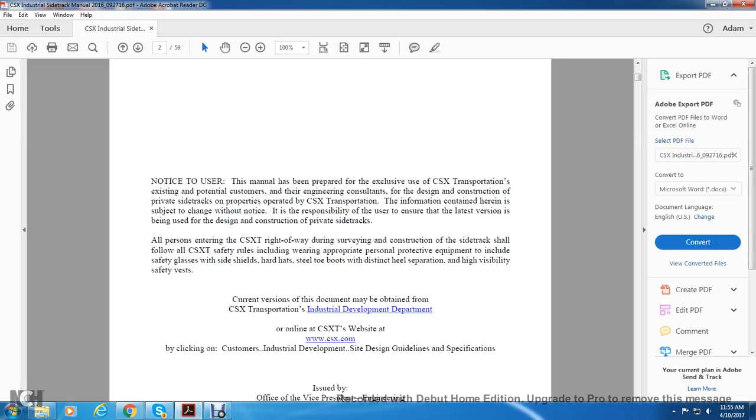All persons entering the CSXT right of way during survey or construction of the side track shall follow CSX Transportation safety rules, including wearing appropriate personal protective equipment, to include safety glasses, shields, hard hats, steel toe boots, distinct heel separation, and high visibility safety vests.

Current version of the document may be obtained through the CSX Transportation Industrial Development Department online at the CSXT website, csx.com, by clicking on Customer and Industrial Development, Site Design Guideline Specification, issued by the Office of Vice President Engineering, CSX Transportation Incorporated, 500 Water Street, J350, Jacksonville, Florida, 32202, 2016.

Standard specification for the design and construction of private side tracks. Design. Table of contents: Design.

A. General. B. Roadbed and drainage. C. Track design, Table 1, turnout geometry data. D. Structures. E. Clearance. F. Crossing. G. Hazardous materials. H. Design criteria, Table 2, Design criteria. I. Plans furnished by industry.

Diagrams: Clearance diagrams, all these are diagrams. Standard clearance matrix, roadbed sections, ballast section, roadbed sections, grading of the industrial track, turnouts number 8, turnout and crossover, number 8 offset layout, number 10 turnout and crossover.

Number 10 offset layout. 11 foot, 0 inch vertical lift derail, commercial track, A 640.6(2).

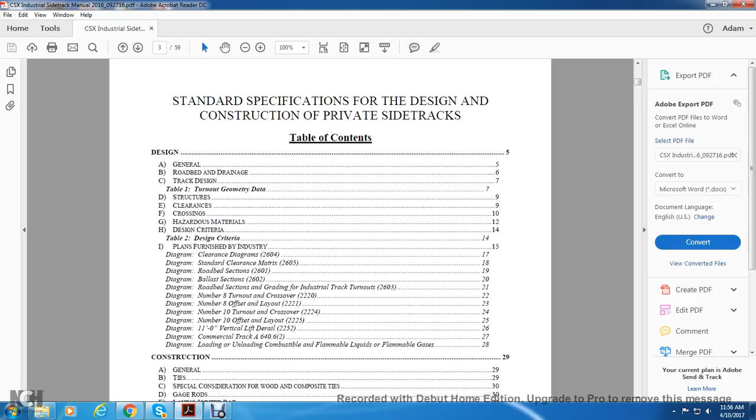Loading and unloading combustible, flammable liquids, or flammable gases.

Construction: A. General. B. Ties. C. Special consideration wood and composite ties. D. Gauge rods. E. Laid joint rail.

Table 3, expansion required joint rail. F. Laying welded rail. G. Spiking. H. Super elevation spirals. I. Surfacing line track. J. Grade crossing.

K. Final cleaning. L. Derails, bumping posts. M. Gates and fences. N. Inspection. O. Maintenance. The following are diagrams.

Main track spiking patterns. Side track spiking patterns. Turnout spiking patterns with the Bethlehem 811 style braces. Turnout spiking patterns with the Bethlehem boltless style braces. Turnout spiking patterns with the Clampttie style braces.

Joint area spiking patterns. Light duty road crossing, concrete and rubber panels. Normal road crossing, rubber asphalt timber wood ties. Sheet 1 and 2, normal road crossing asphalt timber and for wood ties. Diagram: normal road crossing asphalt timber wood ties.

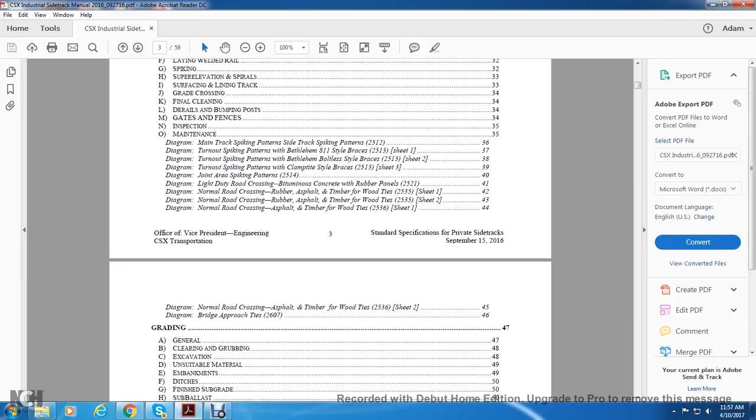Sheet 2, bridge approach ties and grading. A. General, clearing and grubbing. C. Excavation. D. Unsuitable materials. E. Embankments. F. Ditches. G. Finished subgrades.

H. Subballast. I. Geotextiles. J. Pipe culverts, Table 4, corrugated metal pipe specifications. Table 5, elliptical metal pipe specifications. K, erosion protection. L, temporary crossing. M, protection and safety of delay of trains.

O, access materials. General scope, subballast, Table 6, subballast gradation requirements. Table 7, track ballast gradation requirements. E, ties. F, tie plates. G, rail. H, turnouts. I, derails. J, bumping posts.

Design. A, design general. The guidelines are intended to provide information and guidance for the design specification for the construction of private railroad track.

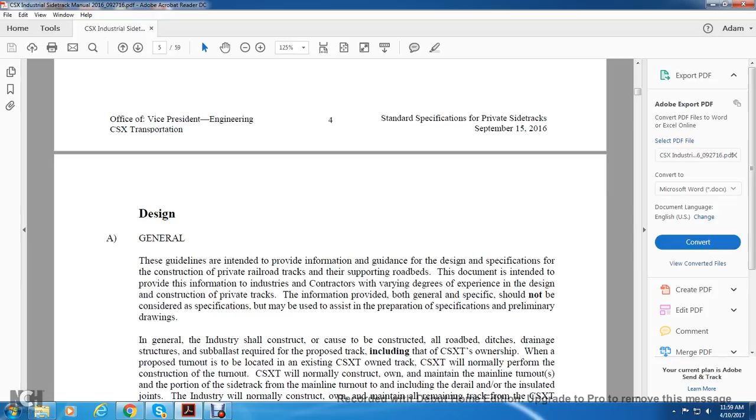In general, the industry shall cover the construction of all roadbed, ditches, drainage structures, and sub-ballast required for the proposed track, including CSX Transportation ownership when the proposed turnout is located in an existing CSX Transportation owned track.

CSX Transportation will normally perform the construction of the turnout. CSX Transportation will normally construct, own, and maintain the mainline turnout portion of the sidetrack mainline turnouts, including the derail and insulated joints. Industry will normally construct, own, and maintain all remaining track from the CSX Transportation owned point into the rest of the industry.

For a proposed turnout located within existing industry-owned track, the industry shall construct, own, and maintain the track. Final ownership and maintenance points will be determined with CSX Transportation.

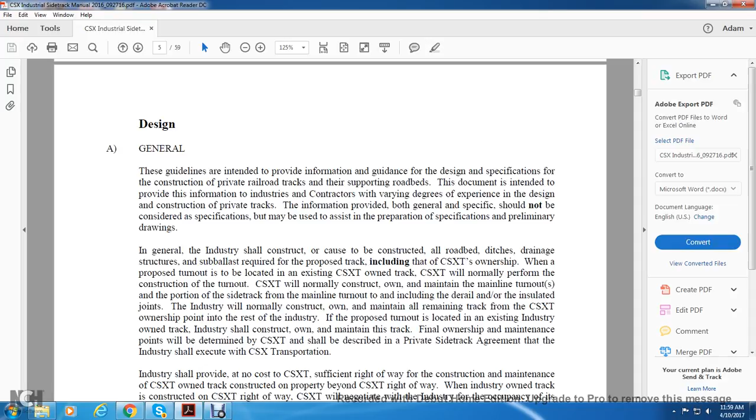This shall be described in the private sidetrack agreement that the industry shall execute with CSX Transportation. Industry shall provide, at no cost to CSX Transportation, sufficient right of way for the construction and maintenance of the CSX Transportation owned track constructed on property beyond the CSX Transportation right of way.

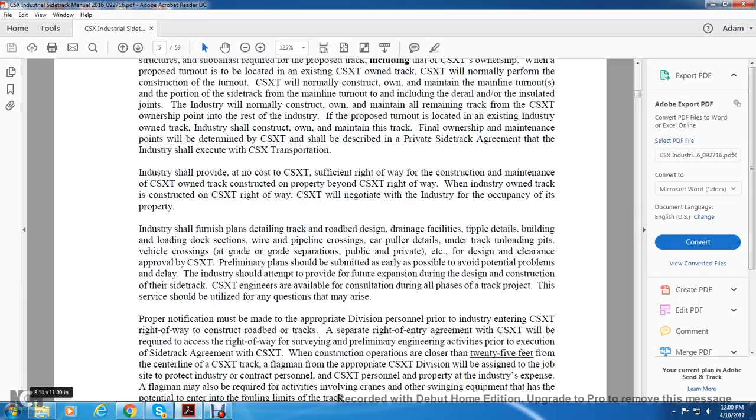When industry's own track is constructed within the CSX Transportation right of way, CSX Transportation will negotiate with the industry for the occupancy of its property.

Industry shall furnish plans with detailed track and roadbed designs, drainage facilities, detailed buildings, loading dock sections, wire and pipeline crossings, car puller details, under-track unloading pits, and vehicle crossing grade separations, public and private.

For design clearance approval from CSX Transportation, preliminary plans shall be submitted as early as possible to avoid potential problems and delays. Industry shall attempt to provide for future expansion during the design and construction of the sidetrack.

CSX Transportation engineers are available to consult with industry during all phases of the track project. This service should be utilized for any questions that may arise.

Proper notification must be made with the appropriate division personnel prior to industry entering the CSX Transportation right of way to construct roadbeds and track. A separate right of entry agreement with CSX Transportation will be required to access the right of way.

Surveying and preliminary engineering activities occur prior to the execution of the sidetrack agreement with CSX Transportation, for construction operations closer than 25 feet from the center line of the CSX Transportation track.

A flagman from the CSX Transportation Division will be assigned to the job site to protect industry and contract personnel, as well as CSX Transportation personnel and property, at the industry's expense.

A flagman may also be required for activities involving cranes or other swinging equipment that has the potential to enter the fouling limits of the track.

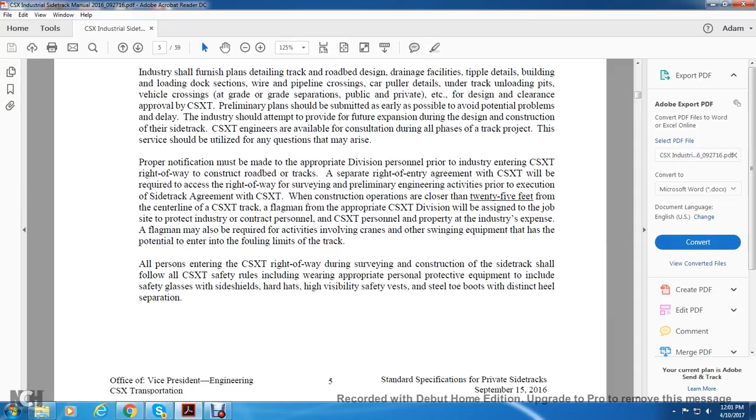All persons entering the CSX Transportation right of way during surveying or construction of the sidetrack shall follow CSX Transportation safety rules, including wearing appropriate personal protective equipment: safety glasses, side shields, hard hats, high visibility safety vests, steel toe boots, and distinct heel separation.

Roadbed and drainage: roadbed widths and ditch slopes shall conform with the current CSX Transportation Standard Roadbed and Ballast Drawings 2601 and 2602, pages 19 and 20.

State and local regulations, codes, and similar requirements may require increased roadbed widths for walkways or other purposes.

Note that the State of Tennessee requires walkways to extend a distance of 10 feet from the center line of the track on both sides, with the level of the top of the walkway at a distance of 6 inches.

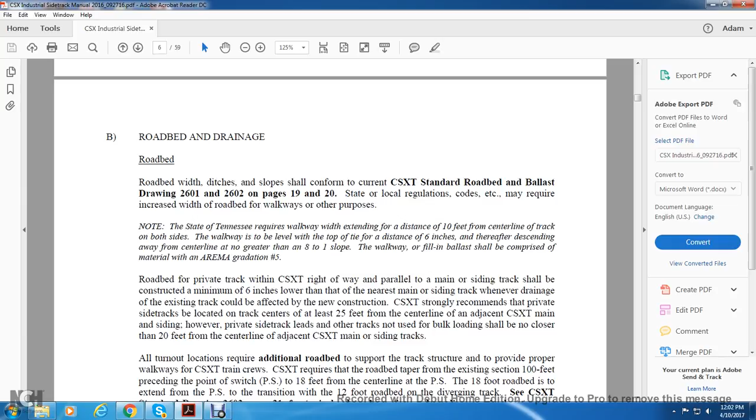Descending away from the center line at a slope no greater than 8 to 1, the walkway fill should be composed of ballast material meeting AREMA gradation number 5.

Roadbed and private track: the CSX Transportation right of way parallel to the main or siding track shall be constructed a minimum of 6 inches lower than the nearest main or siding track.

Whenever drainage of the existing track could be affected by new construction, CSX Transportation strongly recommends that the private side track be located with its track center at least 25 feet from the center line of the adjacent CSX main or siding track. However, this does not apply to private side tracks leading to other tracks not in use.

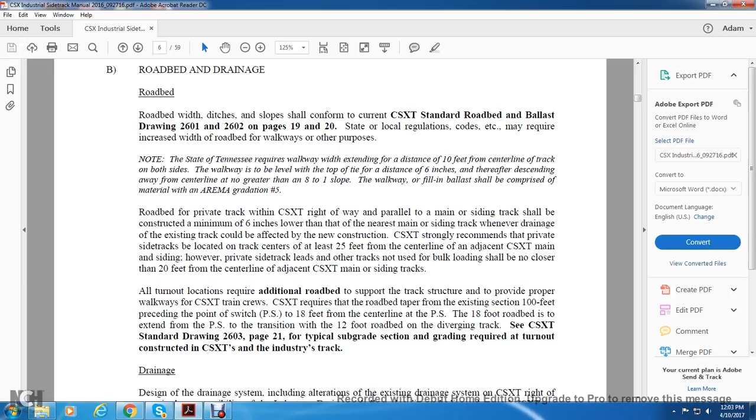Bulk loading shall be no closer than 20 feet from the center line adjacent to CSX Transportation main or siding tracks. All turnout locations require additional roadbed width to support the track structure and provide proper walkways for CSX Transportation train crews.

CSX Transportation requires the roadbed to taper from the existing section 100 feet preceding the point of switch, widening to 18 feet from the center line at the point of switch.

The 18-foot roadbed extends from the point of switch and transitions to a 12-foot roadbed along the diverging track. See CSX Transportation Standard Drawing 2603, page 21.

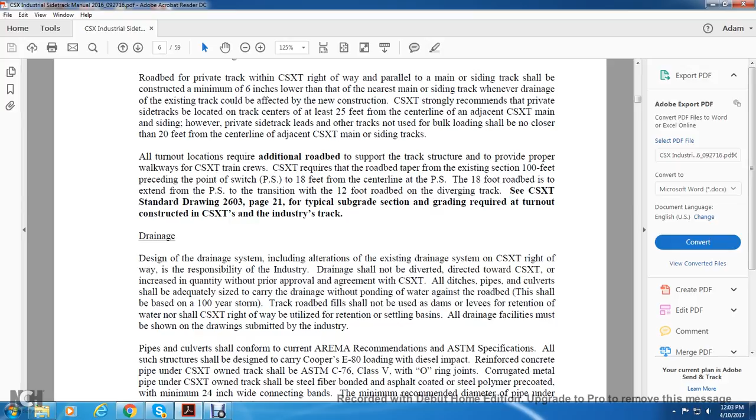This shows the typical subgrade section required at turnout construction for CSX Transportation and industry track.

Drainage: the design of the drainage system, including alteration of the existing drainage system within the CSX Transportation right of way, is the responsibility of the industry. Drainage shall not be diverted or directed toward CSX Transportation.

Drainage quantity shall not be increased without prior approval and agreement of CSX Transportation. All ditches, pipes, and culverts shall be adequately sized to carry drainage without ponding water against the roadbed, and shall be based on a 100-year storm.

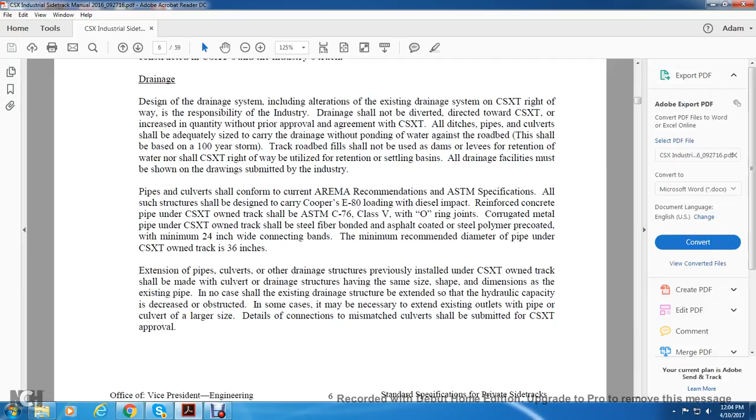The track roadbed fill shall not be used as dams or levees for retention of water, nor shall the CSX Transportation right of way be utilized for retention or settling basins. All drainage facilities must be shown on the drawings submitted by the industry. Pipes and culverts shall conform with the current AREMA recommendations and American Society for Testing and Materials specifications.

All such structures shall be designed to carry Cooper E80 loading with diesel impact. Reinforced concrete pipe under CSX Transportation track shall be ASTM C76 Class 5 with O-ring joints. Corrugated metal pipe under CSX Transportation owned track shall be fiber bonded, asphalt coated or steel polymer precoated, with a minimum 24-inch wide connection band. The minimum recommended diameter for pipe under CSX Transportation owned track is 36 inches.

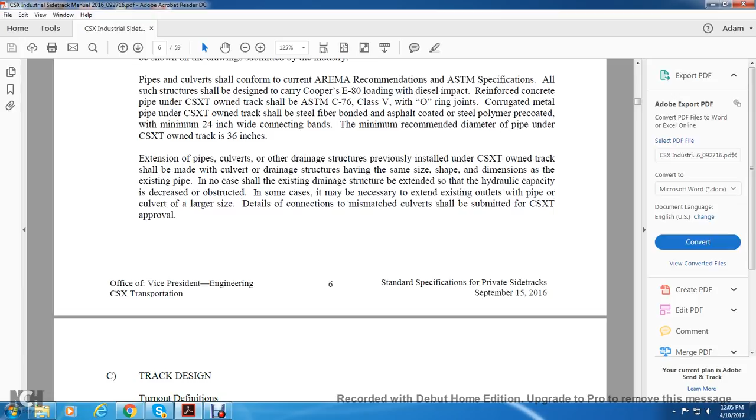Extensions of pipes, culverts, or drainage structures previously installed under CSX Transportation owned track shall be made with a culvert or drainage structure having the same size, shape, and dimension as the existing pipe. In no case shall the existing drainage structure be extended with a decrease in hydraulic capacity. In some cases, it may be necessary to extend existing outlets with pipe or culvert of larger size. The detail of the connection to a mismatched culvert shall be submitted for CSX Transportation approval.

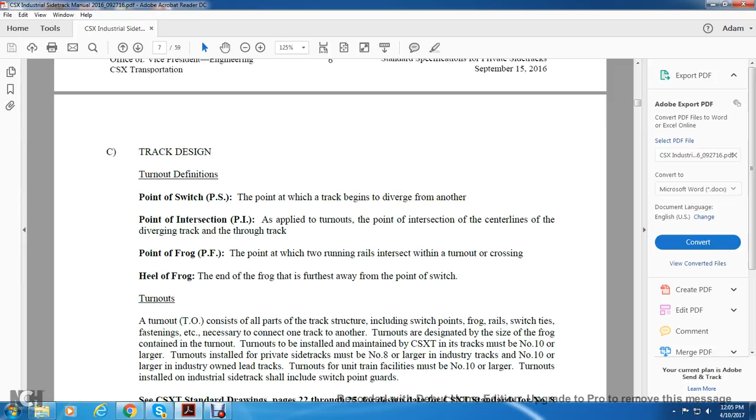Track design, turnout definitions. Point of switch, or PS, the point at which one track begins to diverge from another. Point of intersection, PI, the point of intersection of the center lines of the diverging track and the through track. Point of frog, or PF, the point at which two running rails intersect within the turnout or crossing. Heel of the frog, the end of the frog furthest away from the point of switch. Turnouts: a turnout consists of all the parts of the track structure, including switch points, frog, rails, ties, fastenings, etc., necessary to connect one track to another.

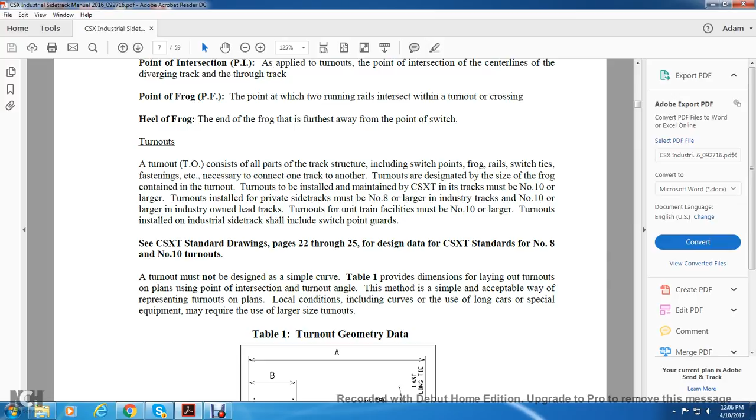Turnouts are designated by the number of the frog contained in the turnout. Turnouts installed in CSX Transportation maintained track must be number 10 or larger. Turnouts installed in private side track must be number 8 or larger for the industry tracks, and number 10 or larger for industry-owned lead tracks. Turnouts for unit train facilities must be number 10 or larger. Turnouts installed in the industrial side track shall include switch point guards.

CSX Transportation Standard Drawings, pages 22 through 25, designate the CSX standard number 8 and number 10 turnouts. The turnout must not be designed as a simple curve. Table 1 provides dimensions for laying out the turnout on plans using the point of intersection and turnout angle. This method is a simple, acceptable way of representing the turnout on the plans. Local conditions, including curves, the use of long cars, or special equipment, may require the use of larger size turnouts.

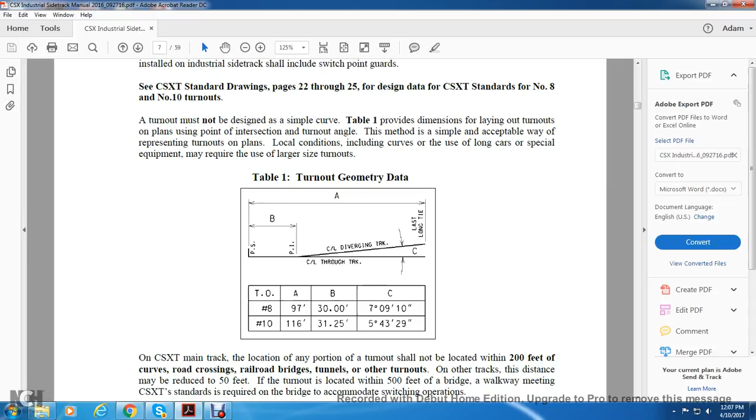Alright, here you see the turnout geometry. A and B are measured from the point of switch to the point of intersection of the centerline and the centerline of the diverging track, to the last long tie. Number 8 and number 10 turnout.

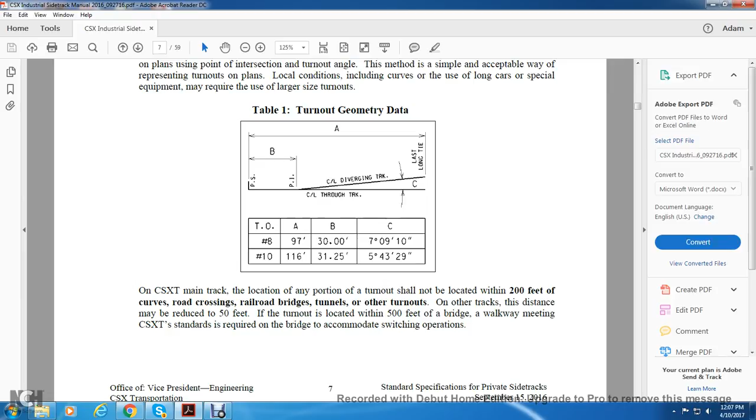On CSX Transportation main track locations, no portion of the turnout should be located within 200 feet of a curve, road crossing, rail bridge, tunnel, or other turnouts. On other tracks, the distance may be reduced to 50 feet. If the turnout is located within 500 feet of a bridge, a walkway meeting CSX Transportation standards is required on the bridge to accommodate switching operations.

Horizontal curve. The track should be designed using the minimum degree, maximum radius curve practical. Special circumstances, including long cars or special equipment, may require a lesser degree of curvature. Sharp curves may restrict the size of the locomotive and the opportunity to provide timely switching service due to locomotive restrictions. A maximum curve of 10 degrees, radius of 573.69 feet, is highly recommended. Under no circumstance, without written approval of the Assistant Vice President of engineering design criteria, will construction of track exceeding 12 degrees of curvature, radius of 478.34 feet, be allowed.

Chord definition of the degree of curve. The degree of curve is the central angle subtended by a 100-foot chord. The degree of curve is denoted as DC. So you have sine of one half DC.

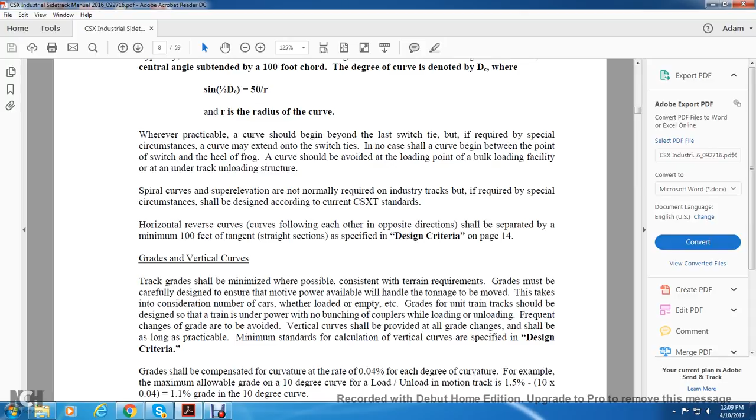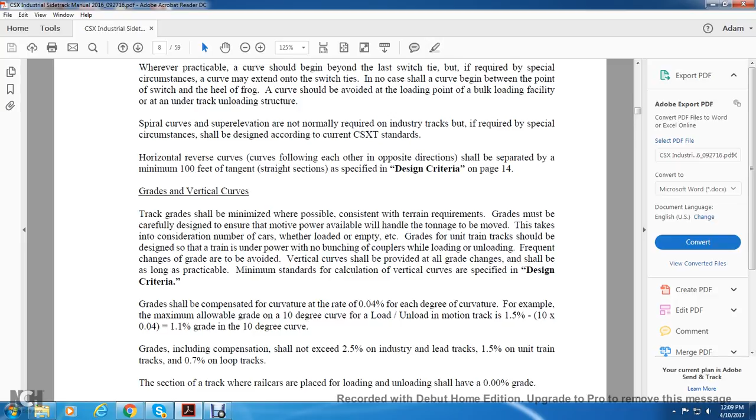Spiral curves and super elevation are not normally required on industry tracks, but if required by special circumstances, they should be designed according to the CSX Transportation standards. Horizontal reverse curves: curves following each other in the opposite direction shall be separated by a minimum 100-foot tangent straight section as specified in the design criteria on page 14.

Page 14. Grade and vertical curves. The track grade shall be minimized where possible, consistent with the terrain requirements. Grade must be carefully designed to ensure the motive power available can handle the tonnage to be moved. This takes into consideration the number of cars when loaded and empty. The grade of the unit train track should be designed so the train stays under power with no bunching of the couplers while loading or unloading.

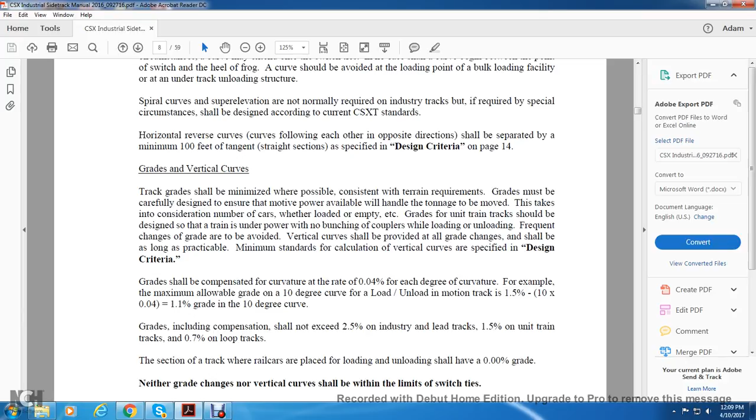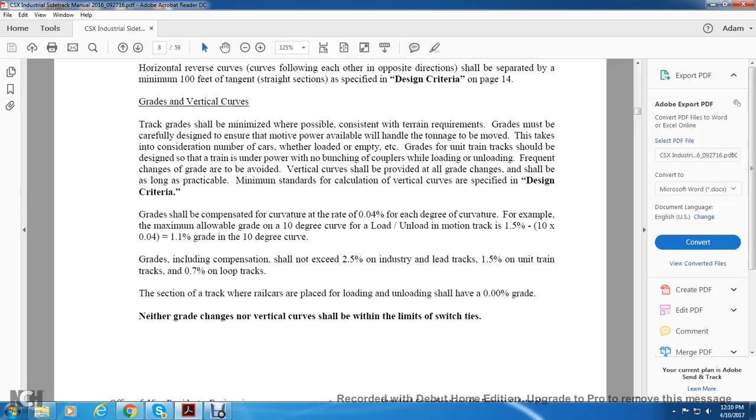Frequent grade changes are to be avoided. Vertical curves shall be provided at all grade changes. They shall be as long as practical; minimum standards for the calculation of vertical curves are specified in the design criteria. Grade shall be compensated for curvature at the rate of 0.04% for each degree of curve. For example, the maximum allowable grade on a 10-degree curve for the load-unload track is 1.5%. 1.5% minus 10 times 0.04 equals 1.1% grade on the 10-degree curve.

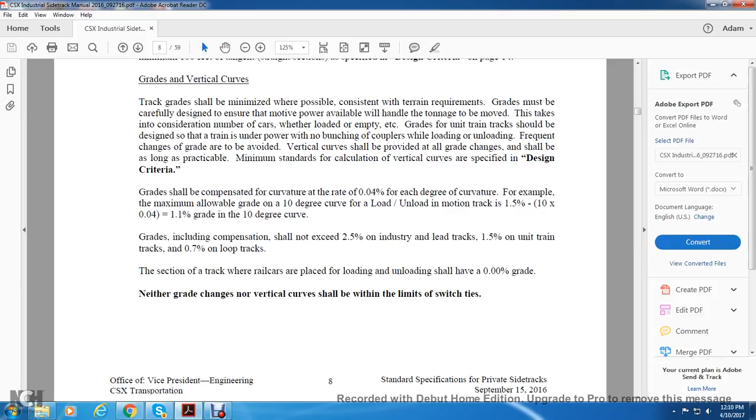Grades including compensation shall not exceed 2.5% on the industry and lead tracks, 1.5% on the unit train tracks, and 0.7% on loop tracks. The section of track where rail cars are placed for loading and unloading shall have a 0.0% grade. Neither grade changes nor vertical curves shall be within the limits of the switch ties.

Alright, derails and bumping posts. CSX Transportation approved derails will be installed at the clearance point of all turnouts connecting with CSX Transportation tracks, per the CSX Transportation 11-foot, 0 inches vertical lifting derail standard drawing 2252 on page 26. The derail shall be placed so as to derail the car away from fouling the track, meaning the protected track, or the building intended to be protected.

The point of switch for a switch point derail shall be located no closer than 50 feet beyond the 15-foot clearance point. Note that additional distance may be required depending on the severity of the descending grade and the track configuration. A bumping post shall be installed at the end of all tracks. The bumping post is used where the track ends short of a structure, roadway, or public area that must be protected from cars rolling or being pushed beyond the end of the track.

In most industrial situations, a bumping post offers adequate protection. However, cars, loaded or empty, rolling or being pushed at an excessive speed will not be stopped by a bumping post. Other measures should be taken to supplement the bumping post. Wheel stops should be used only to prevent a standing car from rolling. A rolling car or one being pushed will most likely not be stopped by a wheel stop, making it ineffective in industry where cars are typically moved. Earthen barriers may be used on mine tracks only.

Alright, D. Structures. All bridges, trestles, box culverts, unloading pits, conveyors, etc. shall be designed under the authority of a licensed professional engineer in accordance with the American Railway Engineering and Maintenance of Way Association Manual for Railway Engineering, latest edition; see arema.org for details pertaining to the manual. Chapter 7, Timber. Chapter 8, Concrete. Chapter 15, Steel Structures, using a live load of Cooper's E80 with full diesel impact.

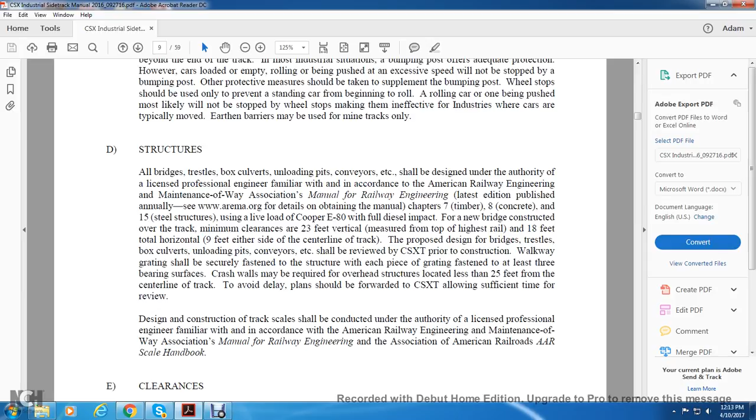Design and construction of the track scales should be conducted under the authority of a licensed professional engineer and in accordance with the American Railway Engineering and Maintenance-of-Way Association Manual for Railway Engineering, and the Association of American Railroads Scale Handbook.

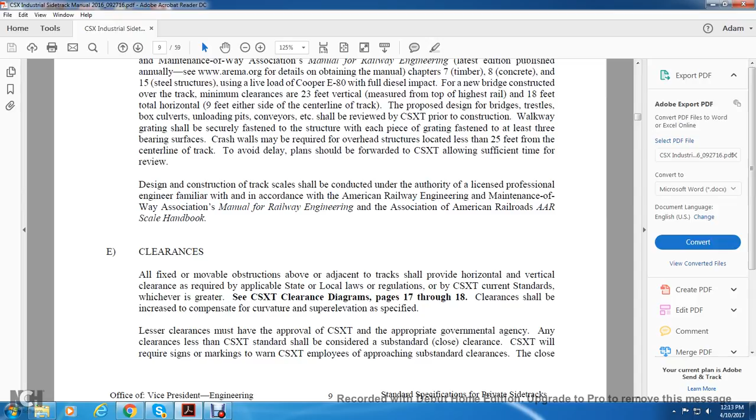Alright, E. Clearance. All fixed and movable obstructions above or adjacent to track shall be provided with the horizontal and vertical clearance required by the applicable state and local laws and regulations or CSX Transportation current standards, whichever is greater. See the CSX Transportation clearance diagrams, pages 17 and 18. Clearances shall be increased to compensate for curvature and superelevation as specified. Lesser clearance must be approved by CSX Transportation and the appropriate governmental agency, and clearance less than CSX Transportation standards shall be considered substandard or close clearance.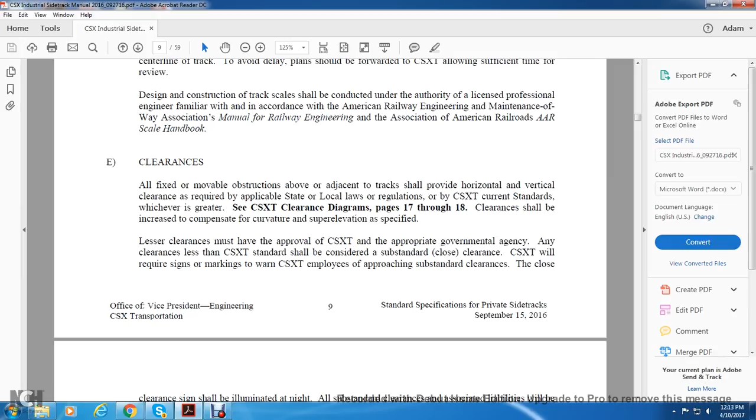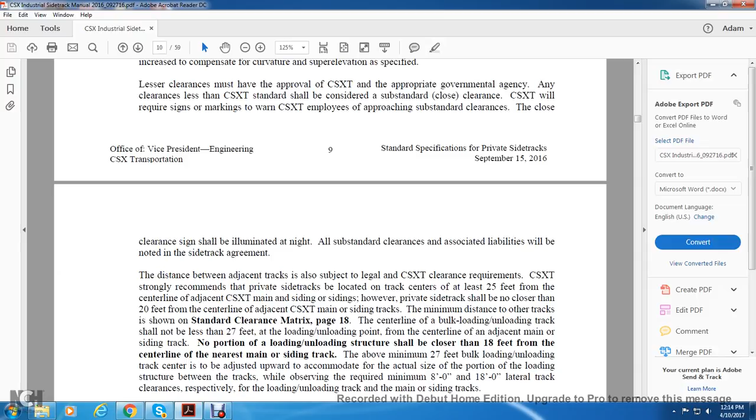CSX Transportation requires signage marking to warn CSX Transportation employees approaching a substandard clearance. The close clearance sign shall be illuminated at night. The substandard clearance and the associated liabilities will be noted in the sidetrack agreement.

The distance between adjacent tracks is also subject to legal and CSX Transportation clearance requirements. CSX Transportation recommends private sidetracks be located with the track center at least 25 feet from the center line of the adjacent CSX main or siding. However, the private sidetrack shall be no closer than 20 feet from the center of the adjacent CSXT main or siding track. The minimum distance for other tracks is shown in the standard clearance matrix.

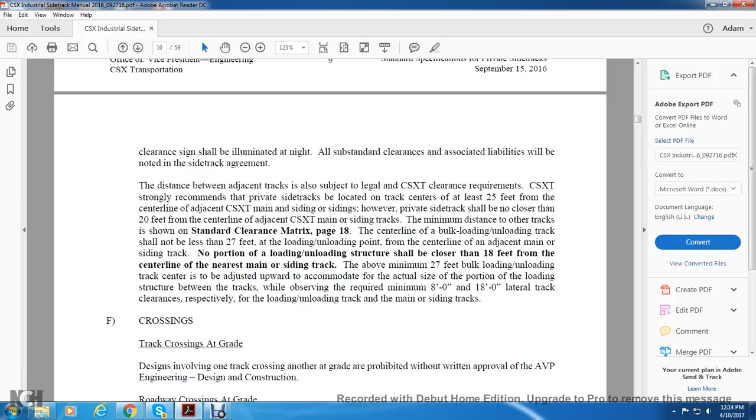Page 18. The center line of the bulk loading and unloading track shall not be less than 27 feet from the center line of the adjacent main or siding track. No portion of the loading and unloading structure shall be closer than 18 feet from the center line of the nearest main or siding track. The above minimum 27 foot bulk loading and unloading track center shall be adjusted upward to accommodate the actual size of the portion of the loading structure between the tracks, while observing the required minimum 8 foot and 18 foot lateral track clearance, respectively, for the loading and unloading track and main or siding tracks.

F. Crossings. Track crossings at grade. Designs involving one track crossing another at grade are prohibited without written approval of the AVP Engineering Design and Construction. Alright, roadway crossings at grade.

Road crossings at grade must be designed to provide proper sight distances. They may require safety measures such as automatic grade crossing warning devices with flashing lights and gates. The triangular sight distance envelope is maintained 300 feet along the track either side of the crossing and 100 feet along the roadway from the nearest track, with sight distance maintained at a height of 3.75 feet above the pavement.

Existing crossings shall be eliminated whenever possible, and new roadway crossings are not permitted without approval of CSX Transportation. In the event a private roadway crossing of CSX Transportation owned track is required, it must be covered by a separate agreement. Information on obtaining the agreement may be obtained from the CSX Transportation website, csx.com.

Where CSX Transportation is the maintaining railroad, CSX Transportation is responsible for the emergency notification signs at each crossing: two signs at each public crossing, and one sign at each private crossing approach. For tracks within a yard or industry, the maintaining railroad is required to place one sign at each vehicular entrance of the facility. Note that only one DOT number is required for the entire facility.

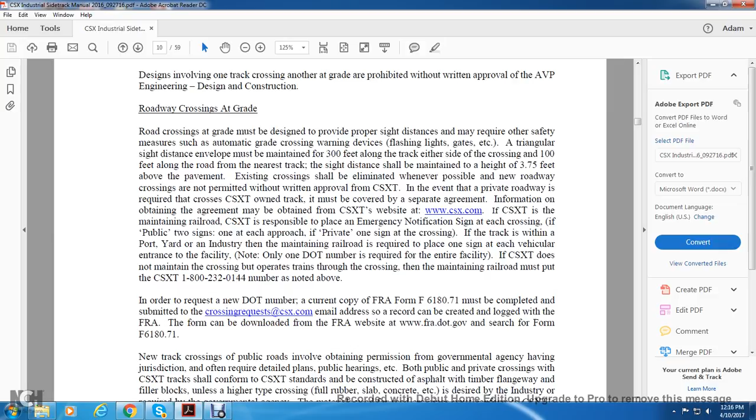Where CSX Transportation does not maintain the crossing but operates trains through it, the maintaining railroad's number must be listed; for CSX Transportation, it is 1-800-232-0144. The numbers are noted above.

F6180.71. New track crossing public roads involves obtaining permission from the governmental agency having jurisdiction, and often requires detailed public hearings. Both public and private crossings with CSX Transportation will conform to CSX Transportation standards, constructed with asphalt, timber, flangeway filler blocks unless a higher type of crossing, full rubber slab, concrete, etc., is desired by the industry or required by the governmental agency. The material used for the road crossing must conform with CSX Transportation specifications. Plans of the roadway crossing must be submitted for CSX Transportation approval.

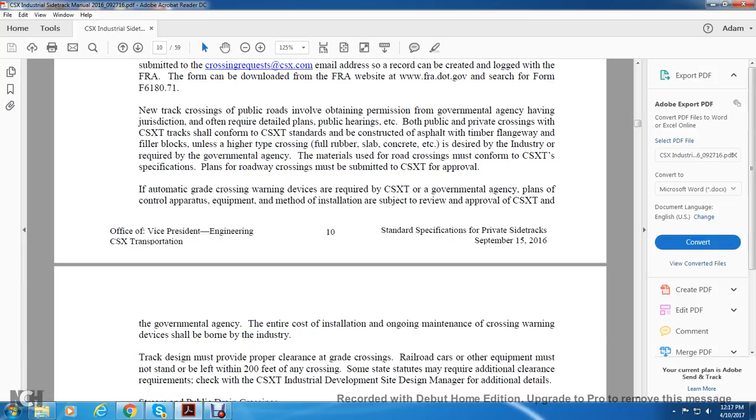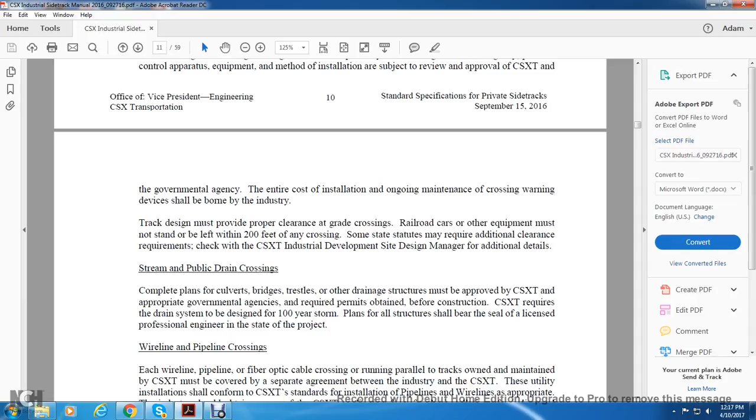If an automatic grade crossing warning device is required, the plans for the control apparatus, equipment and method of installation are subject to the approval of CSX Transportation and the governmental agency. The entire installation and ongoing maintenance for the crossing warning device shall be borne by the industry. Track design must provide proper clearance for the grade crossing. Rail cars and other equipment must not be left within 200 feet of any crossing. Some state statutes may require additional clearance requirements. Contact CSX Transportation Industrial Development Site Design Manager for additional details.

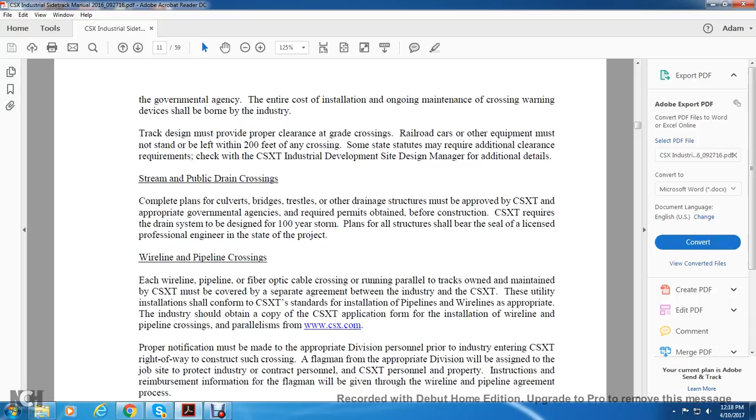Alright, stream or public drain crossings, complete plans for culverts, bridges, trestles or other drain structures, must be approved by CSX Transportation. Appropriate governmental agency permits must be obtained before construction. CSX Transportation requires the drainage system to be designed for a 100-year storm, and plans for all structures shall bear the seal of a licensed professional engineer in the state of the project.

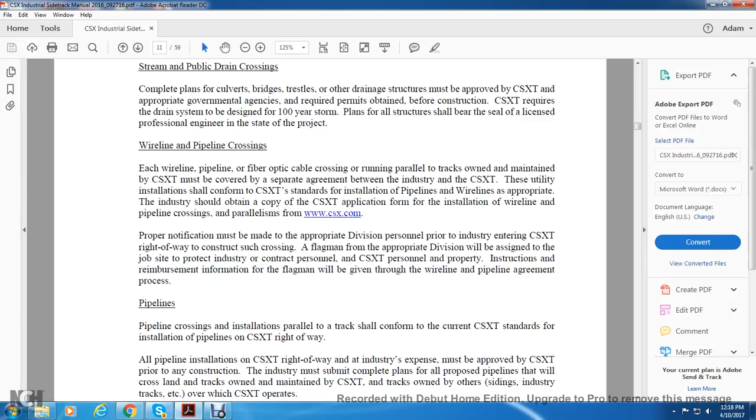Wireline and pipeline crossings. Each wireline or fiber optic cable crossing or running parallel to the tracks owned or maintained by CSX Transportation is covered by a separate agreement between the industry and CSX Transportation. The utility installation shall conform to the CSX Transportation standard for the installation of pipelines and wirelines, and the industry should obtain the CSX Transportation application for installation of a wireline or pipeline crossing or parallelism from csx.com. Proper notification must be made to the appropriate division personnel prior to the industry entering CSX Transportation right of way for the construction of such a crossing.

The industry must submit complete plans for all proposed pipelines that will cross lands and tracks owned or maintained by CSX Transportation, and tracks owned by others, sidings and industry tracks, etc., over which CSX Transportation operates.

Alright, wire lines. Electrical power line clearances, both overhead and lateral, shall conform with CSX Transportation standards and the National Electrical Safety Code. All wire line installations on CSX Transportation right of way must be approved by CSX Transportation prior to any construction. The industry must submit its complete plans per the CSX Transportation standard for the installation of wires on CSX Transportation right of way, with all proposed wire lines that will cross the tracks owned or maintained by CSX Transportation, tracks owned by others, sidings, industrial tracks, etc., over which CSX Transportation operates.

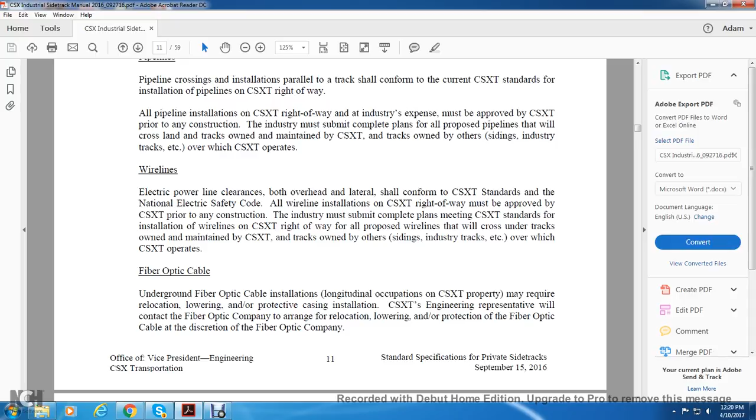Fiber optic cable. Underground fiber optic cable installation and longitudinal occupation of CSX Transportation property may require relocation, lowering, or protective casing installation. A CSX Transportation engineering representative will contact the fiber optic company to arrange relocation, lowering, and protection of the fiber optic cable at the discretion of the fiber optic company. Alright, other crossings. Any other crossing, including but not limited to conveyor crossings over and under the tracks, must conform with the same clearance requirements as overhead bridges, but plans must be submitted for CSX Transportation approval and must be covered by a separate agreement.

Alright, G. Hazardous material. Loading, unloading and storing hazardous material may require special design for the track's minimum clearance, minimum distance from the storage facility, and bonding and grounding of the track. These may be considered when designing track handling hazardous material. The definition of active track: any main, siding or other track owned by CSX Transportation, or any other track over which the speed of trains exceeds 15 miles an hour. Hazardous material.

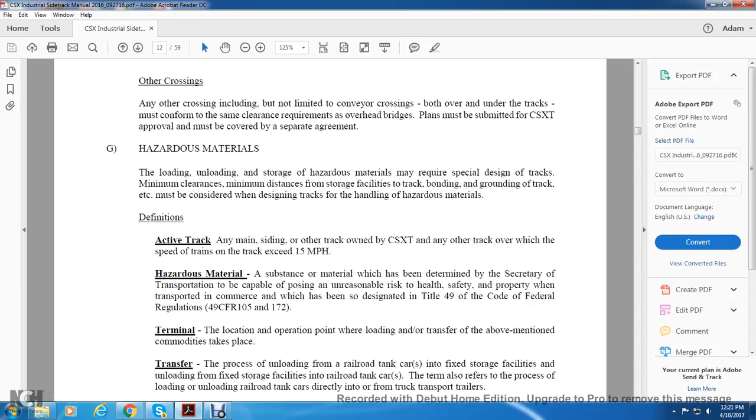Hazardous material: a substance or material which has been determined by the Secretary of Transportation to be capable of posing an unreasonable risk to health, safety, and property when transported commercially, and which has been so designated under Title 49 Code of Federal Regulations 105 and 172.

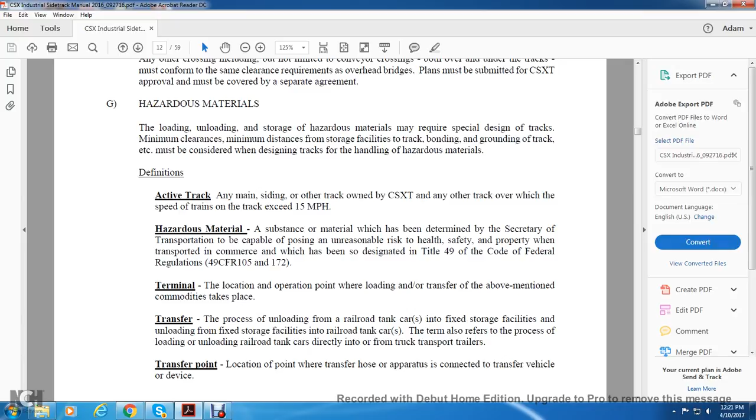Terminal location: the operation point where the loading and transfer of the above-mentioned commodities take place, and transfer, the process of unloading railroad tank cars into fixed storage facilities and unloading fixed storage facilities into railroad tank cars. The term also refers to the process of loading and unloading railroad tank cars directly into and from tank truck transport trailers.

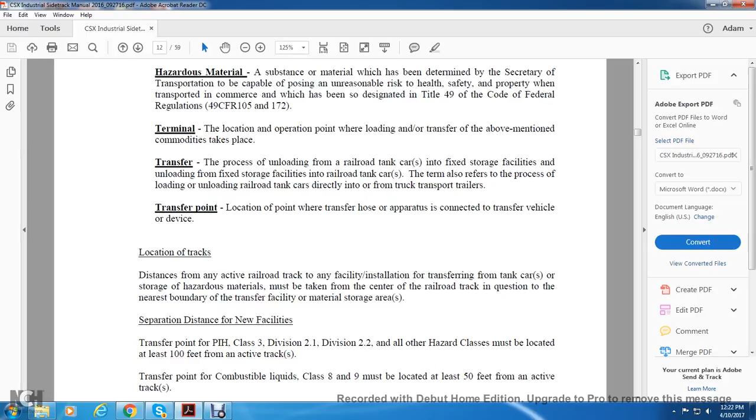Transfer point: the location where the transfer hose or apparatus is connected with the transfer vehicle or device. Location of the track: measurement from any active railroad track to any facility, installation, transfer from a tank car, or storage of hazardous material must be taken from the center of the railroad track in question to the nearest boundary of the transfer facility or material storage area.

Separation distances for new facilities. Transfer points for PIH, poisonous inhalation, Class 3, Division 2.1 and 2.2, and all other hazard classes must be located 100 feet from the active track. Transfer points for combustible liquids, Class 8 and 9, must be located 50 feet from an active track.

Venting of hazardous material from the tank car or storage tank must be constructed so that it effectively permits free flow of the vapors from the tank car or storage tank and positively prevents the escape of the vapors into the air. The vapors must be carried to a vent line at a point not less than 100 feet from the nearest occupied building and an active track.

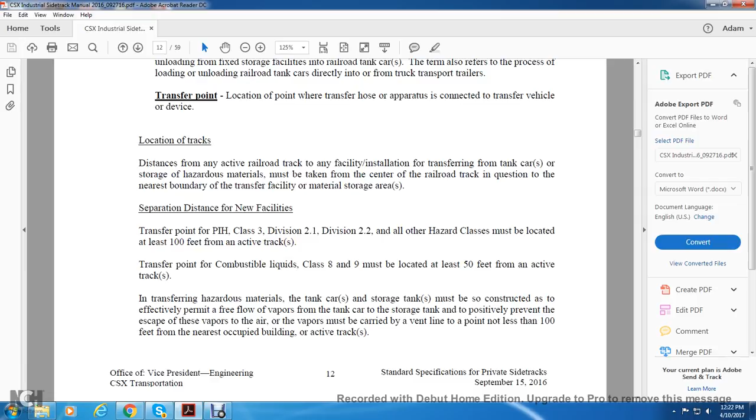Preferably the site shall be located with the ground sloping away from the active track. Whenever possible, the transfer equipment shall be placed on the same side of the private track as the storage tanks to avoid crossing under and over such track. Equipment should be located on the same side of the track as the highway access to minimize crossing the sidetrack by trucks providing services.

Hazardous material terminals must be sloped and contoured to contain any spill in the transfer area in addition to the track pans, or any other type of acceptable containment system must be installed to contain spills of material, preventing contamination of underground water resources. Customers must isolate the transfer point from track rail movement during the transfer operation. This shall be accomplished by locking derails at the facing point of the track turnout, restricting movement during transfer operations.

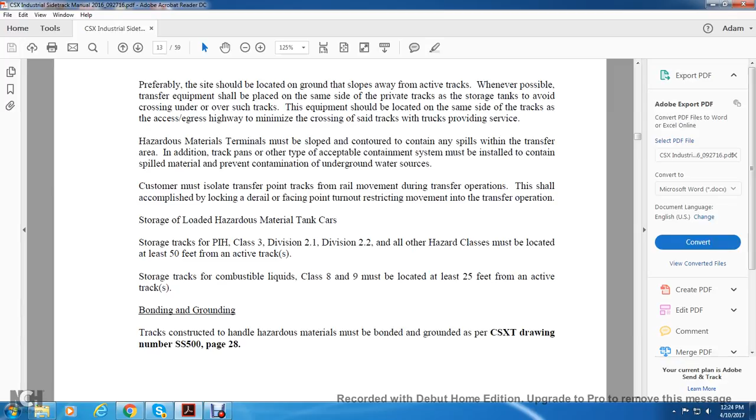Storage of loaded hazardous material tank cars and storage tanks of poisonous inhalation, Class 3, Division 2.1, 2.2, and other hazard classes must be located at least 50 feet from the active railroad track. Storage track for combustible liquids, Class 8 and 9, must be located 25 feet from the active tracks. Bonding and grounding: tracks constructed to handle hazardous materials must be grounded as per CSX standard SS500, page 28.

H. Design criteria. The design criteria to be used on sidetracks with operating speeds not exceeding 15 miles an hour are listed in the following table. The criteria are not intended for yard or terminal tracks, intermodal tracks, branch or spur lines, nor any track with operating speeds greater than 15 miles an hour.

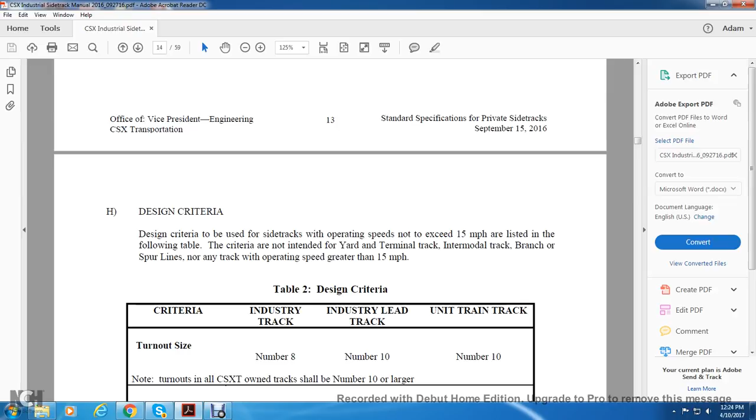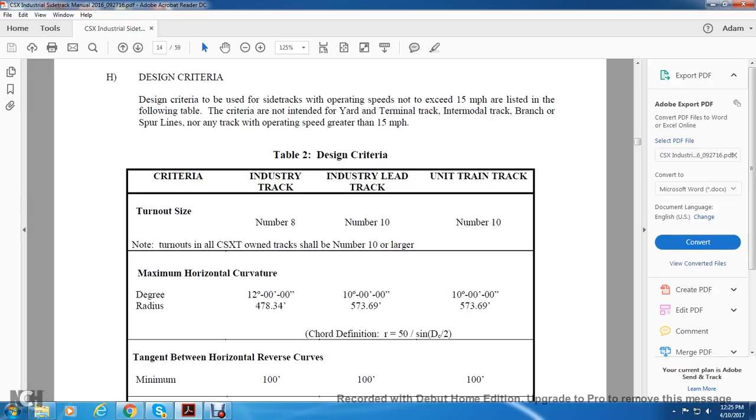Turnout size: note that turnouts on CSX Transportation shall be number 10 or larger. Industrial track number 8, industrial lead track 10, unit train track 10. Degree of curve: 12 degrees for number 8, 12 degrees 0 minutes 0 seconds, and 10 degrees 0 minutes 0 seconds for both 10s. Your radius of horizontal curvature for 12 degrees is 478.34 feet, and for 10 degrees 573.69 feet.

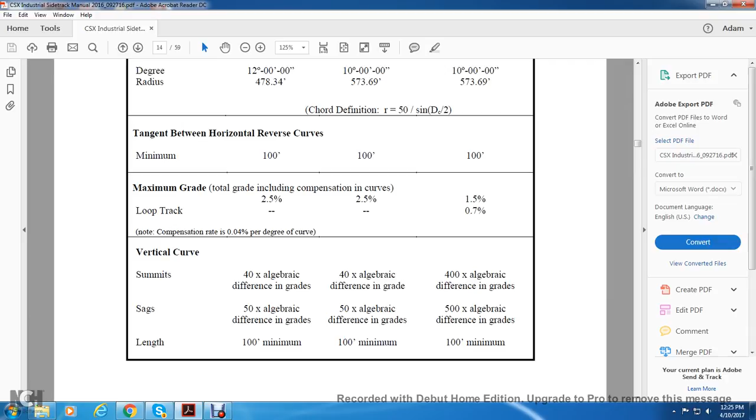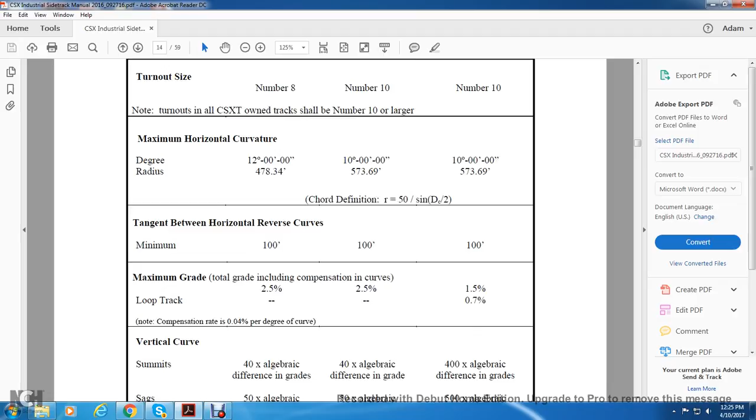Tangent between horizontal curves: minimum of 100 feet. Maximum grade, compensated for curves, loop track: number 8, 2.5 percent; 2.5 percent for number 10; and number 10 unit train track, 1.5 and 0.7. Your vertical curve for number 8 is 40 times the algebraic difference in grades, sags 50 times the algebraic difference in grades, 100 foot minimum.

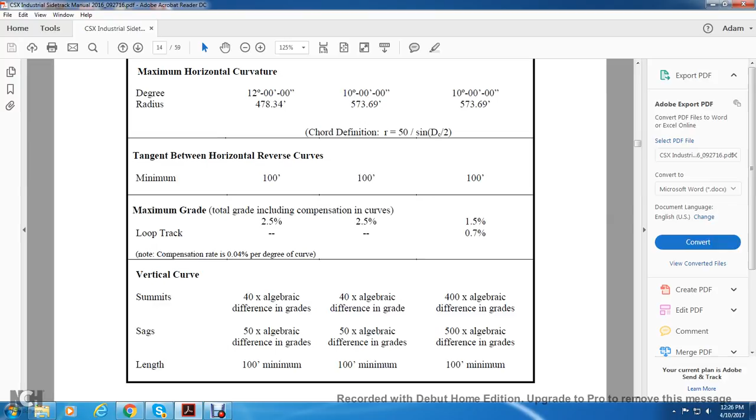Your industrial lead track, 10 degrees: 40 times the algebraic difference in grades, 50 times the algebraic difference in grades for sags, length 100 feet minimum. And your unit train track, number 10 turnout: 400 times the algebraic difference in grades, 500 times the algebraic difference in grades, at 100 foot minimum.

Plans furnished by the industry should expedite the review procedure. Plans submitted with the industrial consultant should provide the appropriate CSX transportation files in Portable Document Format and Microstation, along with all references and supporting files.

The electronic files will be forwarded on a USB memory stick or via email. Email attachments are subject to a 5.0 megabyte limit for file size. A sheet should be included listing levels or layers with a description of instructions regarding the reference files.

Special cell libraries should also be included with the sheets. A printed plan shall be furnished to CSX transportation upon request. The plan should include the track layout drawing showing the arrangement covering the new track. The drawing shall be at a convenient scale, not larger than 11 inches by 17 inches.

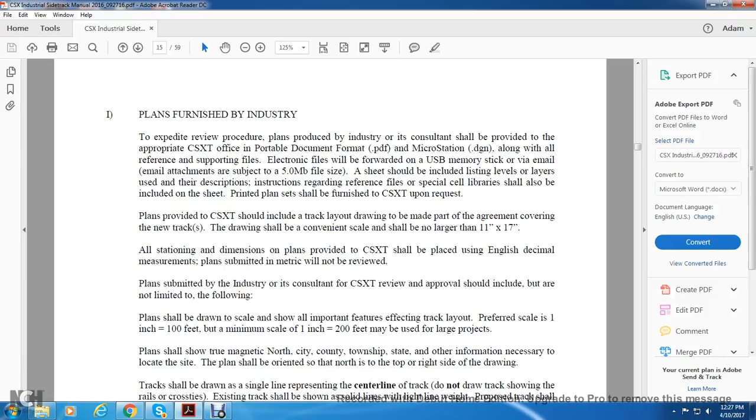All station dimensions of the plan provided to CSX transportation shall be placed in English decimals. Measurements submitted in metric will not be reviewed. Plans should be submitted to the following, as submitted by the industry consultant for CSX transportation review.

The plans shall include but are not limited to the following. Plans shall be drawn to a scale that properly represents the effective track layout. A preferred scale of 1 inch to 100 feet is recommended, but a minimum of 1 inch to 200 feet may be used on large projects.

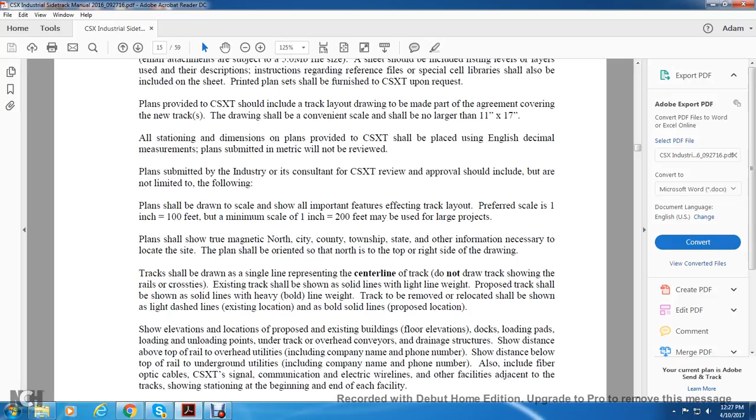Plans should show true magnetic north, the city, county, township, state, and other information necessary to locate the site. The plan shall be oriented with north at the top or right side of the drawing.

Track shall be drawn with a single line representing the center line of the track. Do not draw the track showing the rails or cross ties. Existing tracks shall be designated with a solid, lightweight line. Proposed tracks shall be shown with a solid, heavy, bold line.

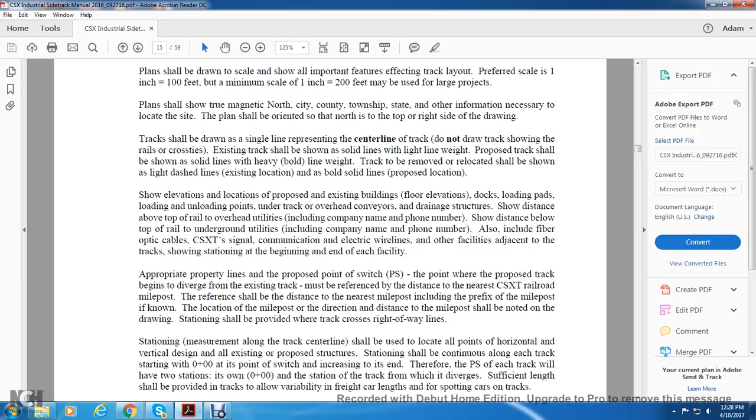Track to be removed shall use dashed lines. Tracks to be removed or relocated shall be indicated with dashed lines for the existing location, and a bold solid line for the proposed location.

Show elevations and locations of proposed and existing building floors, elevations, docks, loading and unloading pad points, under-track and overhead conveyors, and drainage structures showing distance above the top of rail. Show overhead utilities, including company name and phone number, and their distance below the top of rail for underground utilities, including company name and phone number.

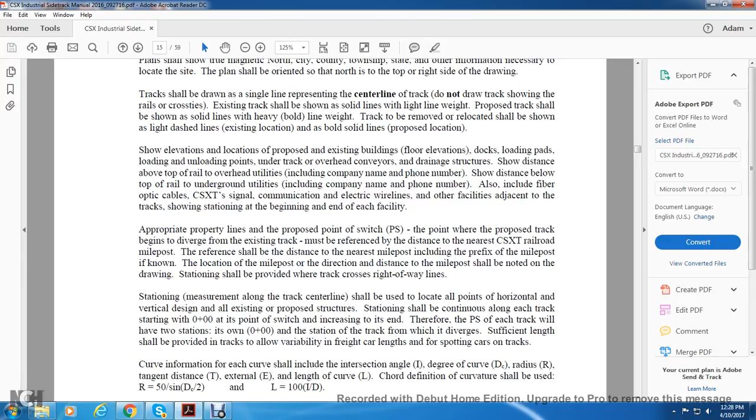Also include fiber optic cables, CSX transportation signal and communication lines, electric wire lines, and other facilities adjacent to the track. These should be stationed at the beginning and end of each facility.

Show appropriate property lines, proposed switch points, and the point where the proposed track begins diverging from the existing track, referenced by distance to the nearest CSX transportation milepost. The reference shall give distance from the nearest milepost, including its prefix if known. The location of the milepost, direction, and distance to it shall be noted on the drawing.

Stations shall be provided where the track crosses the right of way. Station measurements along the track center line shall be located at all points of horizontal and vertical design.

All existing and proposed structure stations shall be continuous along the track, starting at 0 plus 00 at the point of switch and increasing from there. Each diverging track will have its own 0 plus 00 station measured from the point on the track from which it diverges.

Sufficient length shall be provided for the track to allow for variability of freight car lengths and for spotting along the track.

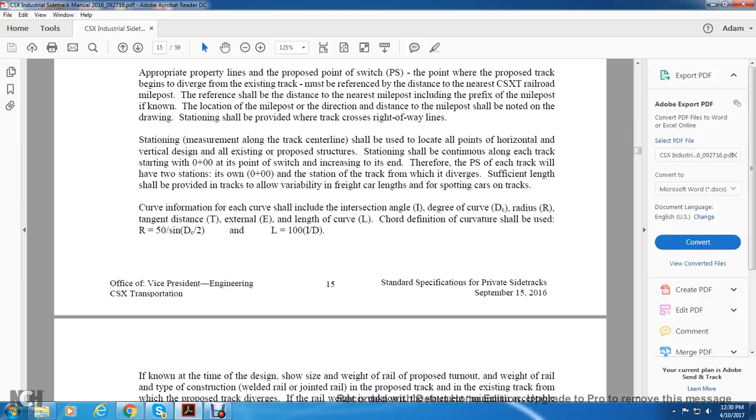If known at the time of design, show the weight of rail proposed, with the turnout weight of rail, type of construction (welded or jointed rail), and how the proposed track connects with the existing track from which it diverges. If the rail weight is unknown...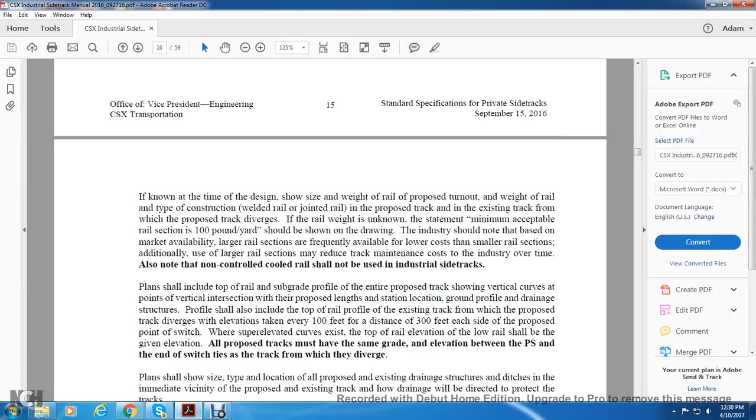The statement of minimum acceptable rail section, 100-pound yard, shall be shown in the drawing. The industry should know that based on market availability, larger rail sections are often more available at lower cost than smaller rail sections. Additionally, a larger rail section may reduce track maintenance costs for the industry over time.

Also note that non-controlled cooled rail shall not be used in industrial side tracks. The plan should include the top-of-rail subgrade profile of the entire proposed track, showing the vertical curve at the point of vertical intersection, with proposed length, station location, ground profile, drainage, and structures.

The profile should also include the top-of-rail profile of the existing track from which the proposed track will diverge, with elevations taken every 100 feet for a distance of 300 feet on each side of the proposed point of switch. Where superelevated curves exist, the top-of-rail elevation of the low rail shall be the given elevation. All proposed track must maintain the same grade elevation between the point of switch and the end of the switch ties at the track from which they diverge.

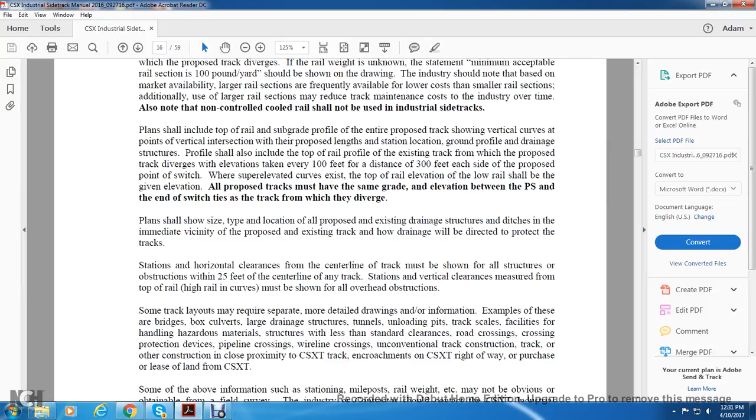The plan shall show the size, type, and location of all proposed and existing drainage structures and ditches in the immediate vicinity of the proposed and existing track, and how drainage will be directed to protect the track.

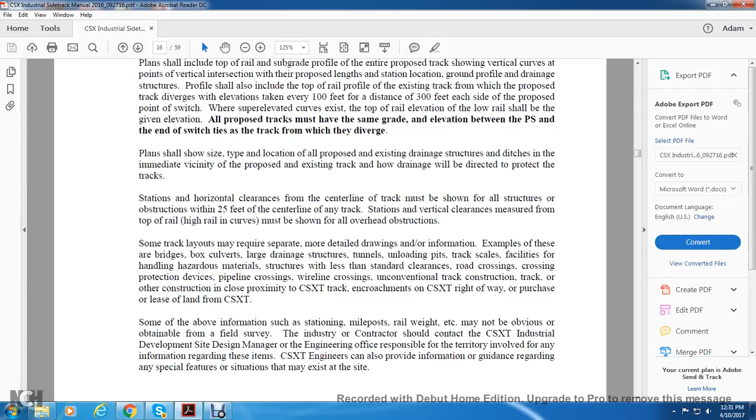Stationed horizontal clearance from the center line of the track must show any structure or obstruction within 25 feet of the center line of the track. Stationed vertical clearance, measured from the top of rail on the high rail in a curve, must be shown for all overhead obstructions.

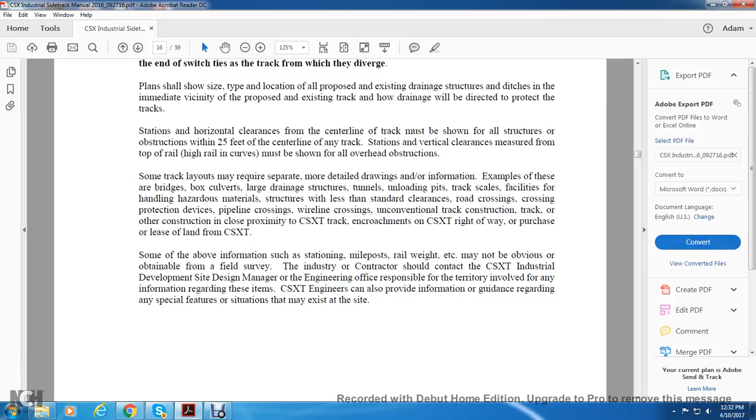Some track layouts may require separate, more detailed drawings or information. Examples include bridges and box culverts, large drainage structures, tunnels, unloading pits, track scales, facilities handling hazardous materials, structures with less than standard clearance, road crossing protection devices, pipeline crossings, wireline crossings, and unconventional or construction track near other crossings, in close proximity to CSX track, encroachment, or CSX Transportation right-of-way purchases or lease of land.

Some of the information, such as station, milepost, rail weight, etc., may not be obvious or obtainable through field survey.

The industry or contractor should contact the CSX Transportation Industrial Development Site Design Manager, or the engineering office responsible for the territory involved, for any information regarding these items. CSX Transportation engineers can also provide information and guidance regarding any special feature or situation that may exist on the site.

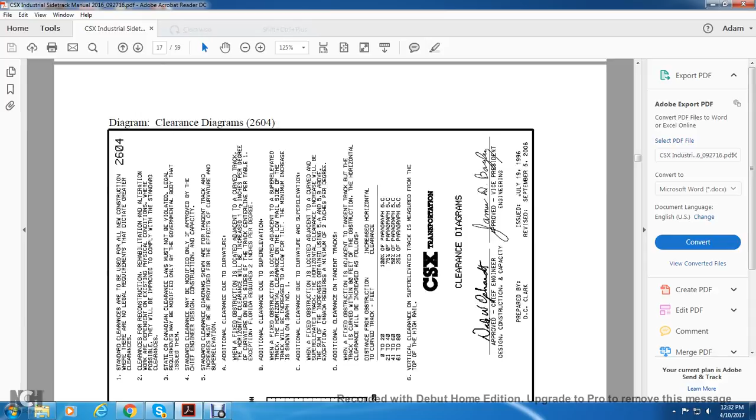Alright, we're going to go do some clearance diagrams now for chapter 1. Let me back out of this.

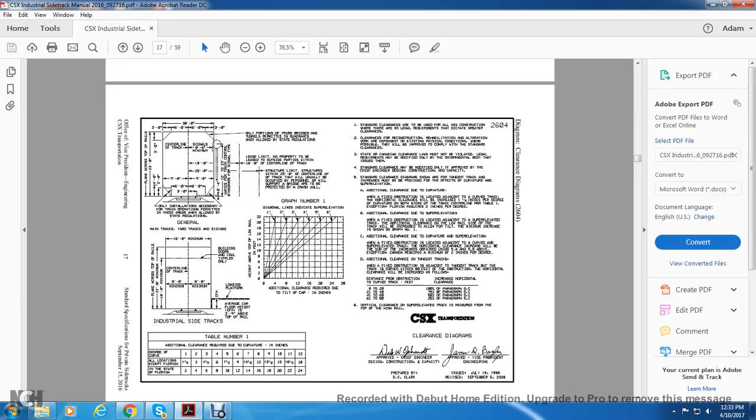Alright, this shows your general standard specifications for private side tracks. Here's the track, showing the center line of the track and signals to the right — an industrial side track with a loading platform.

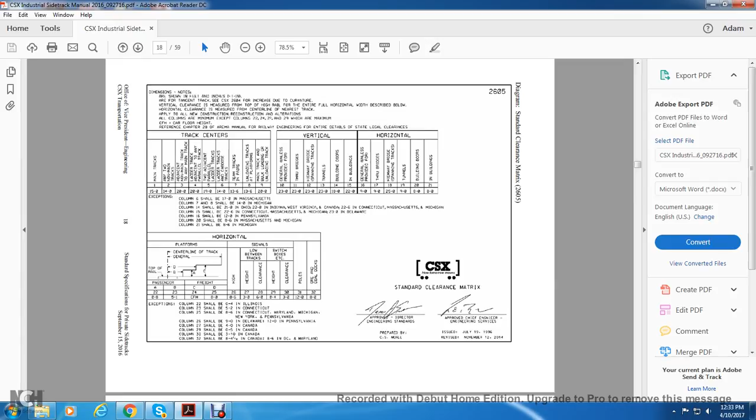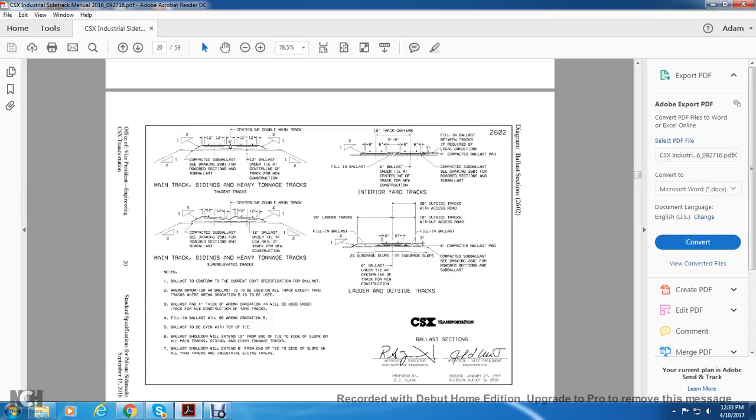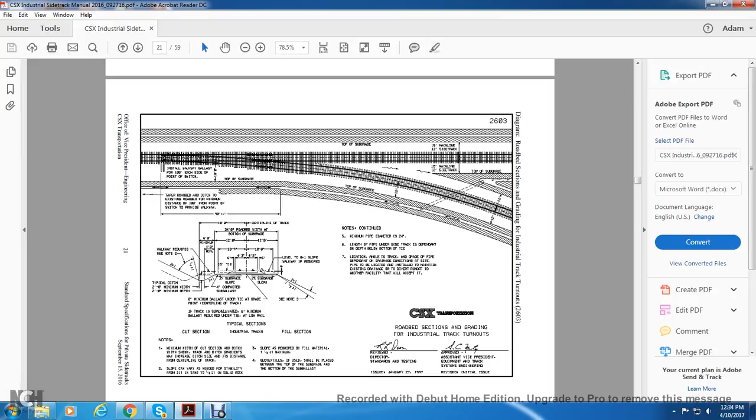Alright, this shows the typical cut section of a roadbed and grading for industrial track turnout sections, including the gradings and signal lines for turnouts, along with a cross section of the rail.

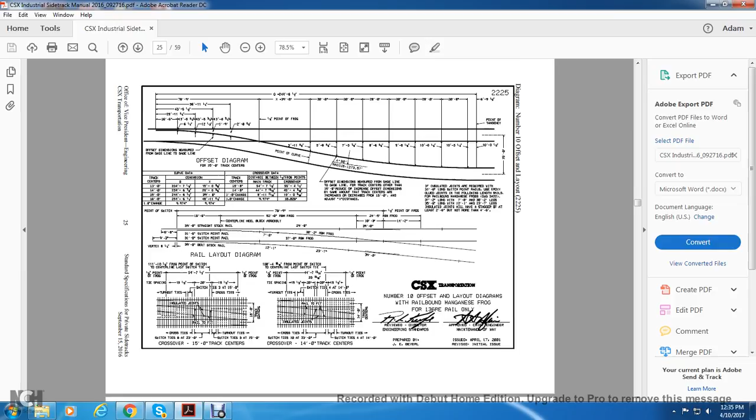Your number 10 offset layout diagram, rail-bound manganese frog for the 136 running rail only. Offset diagram, rail layout diagram, crossover at 15 foot and 14 foot track centers.

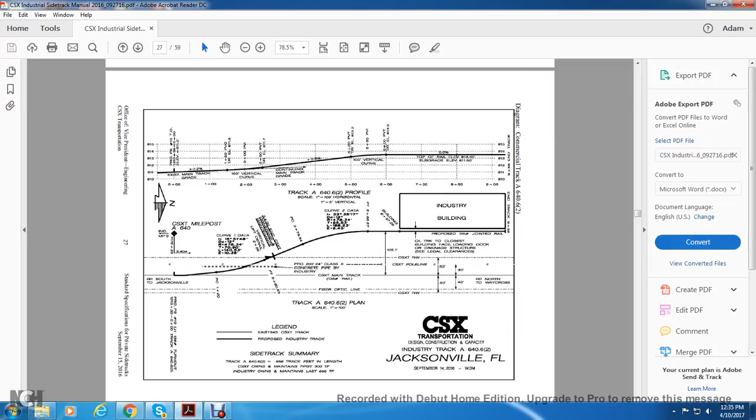And transportation legend: sidetrack summary, industrial building, track A plan, mileposts.

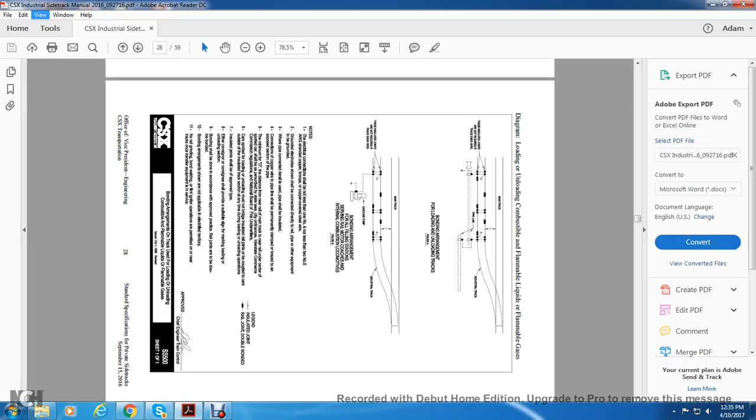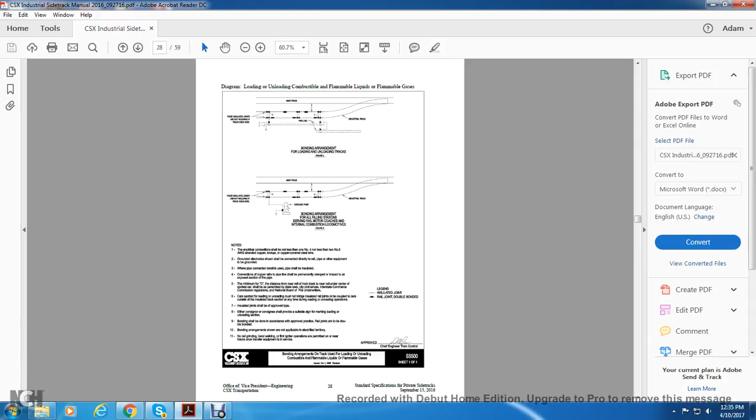Bonding arrangement for loading and unloading tracks, bonding arrangement for all filling stations serving rail motor coaches and internal combustion locomotives.

Alright, then it's on to part 2, construction. Sorry, I was listening to Limp Bizkit.